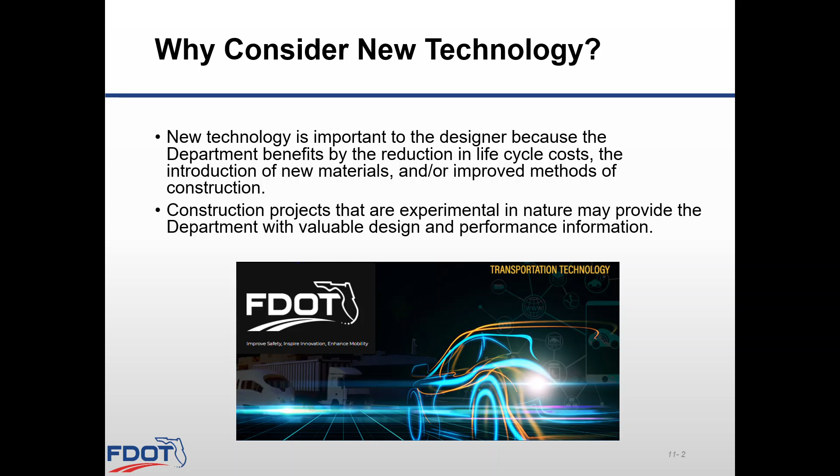Construction projects that are experimental in nature may provide the department with valuable design and performance information. Experimental projects should be carefully coordinated with the State Materials Office Pavement Evaluation Section to set up controls and experimental limits so that the detailed performance evaluations can be made over time. Experimental projects should be limited in scope and not used for the first time on a major interstate project.

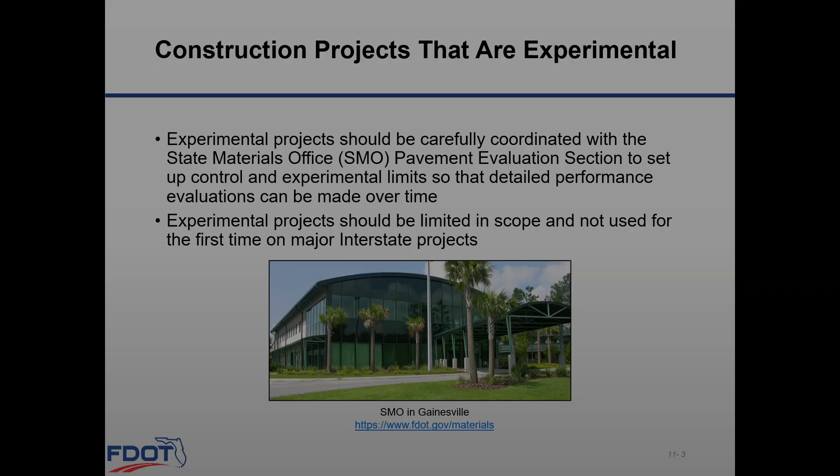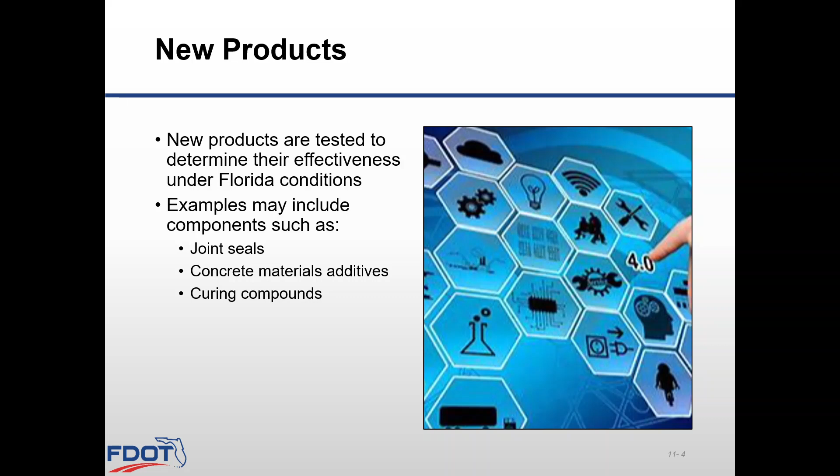This picture on the slide shows the State Materials Office in Gainesville and also their website to find any information and coordinate any experimental projects. New products are tested to determine their effectiveness under Florida conditions. Some examples may include components such as joint seals, concrete materials, additives, and curing compounds.

Generally, APT is defined as a controlled application of a realistic wheel loading to a pavement system simulating long-term in-service loading conditions. This allows for the monitoring of pavement systems performance and response to accelerated accumulation of damage. APT can produce early, reliable, and beneficial results while improving pavement technology and understanding prediction of pavement systems performance. So this website has some of that research, if you would like to learn more about the research that is being done or has already been done.

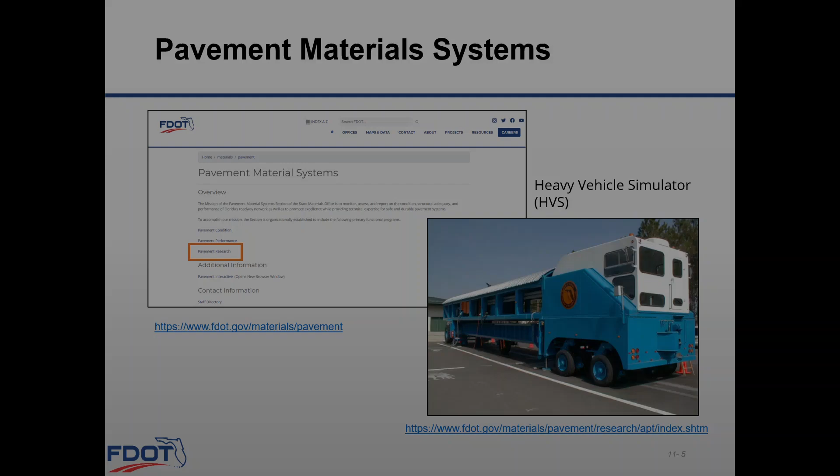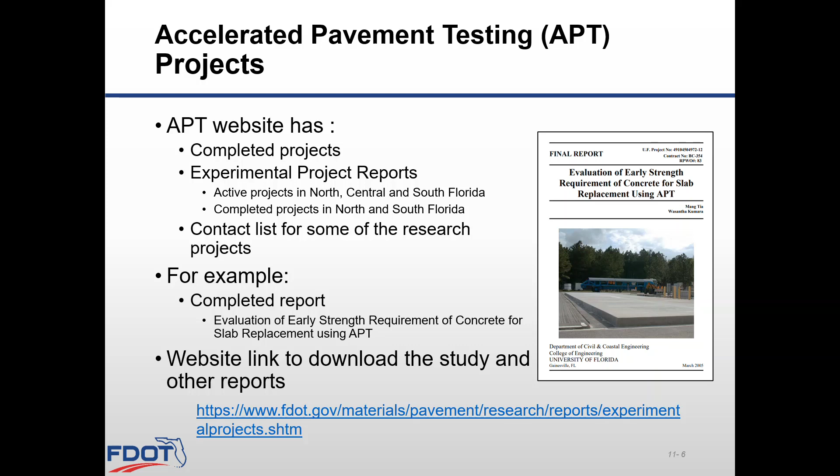Under the APT website, you can find completed projects, experimental reports for active projects in North, Central and South Florida, and completed projects for North and South Florida. This is just one example of the types of completed projects, the evaluation of early strength requirements of concrete for slab replacement using APT. You can download any of the research studies under the website shown on the link below.

Another experimental project that is ongoing is the FDOT concrete test road located on US 301. This is 2.5 miles of experimental concrete pavement open to real-world traffic. The objectives for this project are to perform structural, drainage, and calibration experiments. It is unique in that it is the only full-scale concrete pavement test facility of this type in the southeastern United States.

Some of the structural experiments are to investigate different concrete thicknesses and base types from 6 to 10 inches with 5 different base configurations and use of reclaimed asphalt pavement (RAP) as an aggregate. Some of the drainage experiments include 16 test sections that will be constructed with and without edge drains. Concrete joints will be sealed and unsealed to study the effect of water infiltration. 2 concrete pavement thicknesses will be used while keeping the base type constant.

The calibration experiment will consist of 16 test sections to calibrate the fatigue cracking equation within the Mechanistic Empirical Design Guide. In addition to these experiments, several surface textures will be applied to evaluate the effect on pavement friction, surface drainage, and tire-pavement noise. Some of the proposed alternative surface textures include longitudinal grooving, a combination of longitudinal diamond grinding and transverse grooving, and a new longitudinal grinding technique known as the Next Generation Concrete Surface, NGCS. Here's the website link to learn more about the concrete test road.

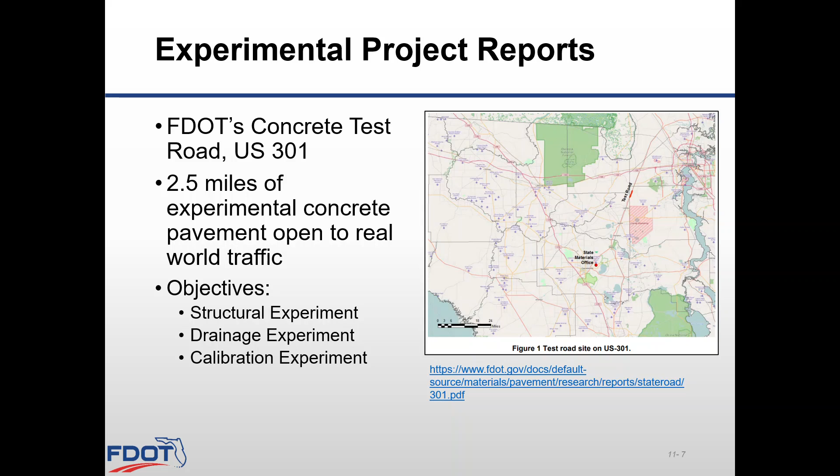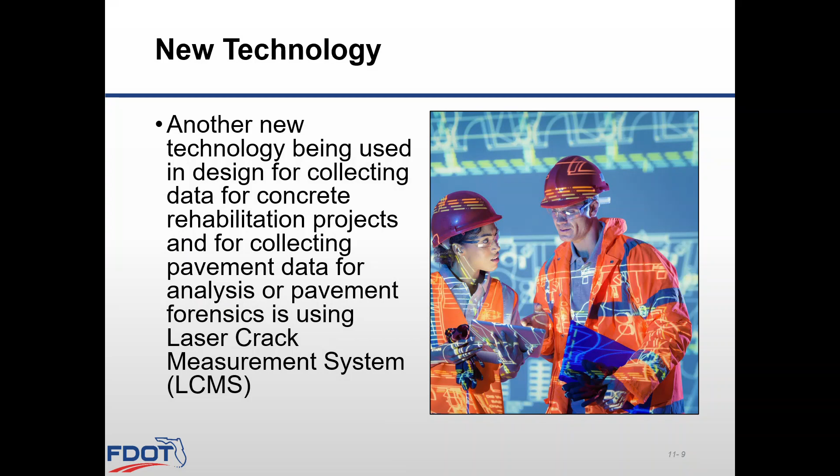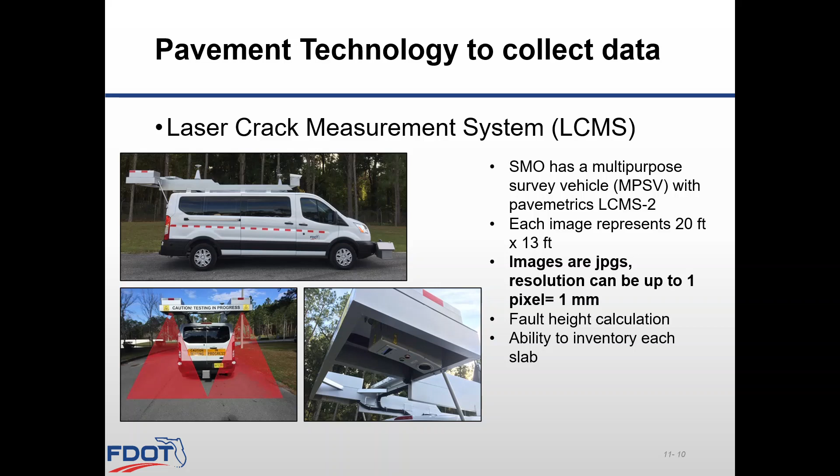Other new technology being used for collecting data for concrete rehabilitation projects and for collecting pavement data for analysis or pavement forensics is laser crack measurement systems, LCMS. The Materials Office has a multi-purpose survey vehicle, MPSV, with Pavemetrics LCMS-2. Each image represents 20 feet by 13 feet. These images are JPEGs, with resolutions up to 1 pixel equal to 1 millimeter. They can provide faulting height calculations and can inventory each slab, which is essential for designers as a safe method for collecting this data and analyzing concrete rehabilitation projects.

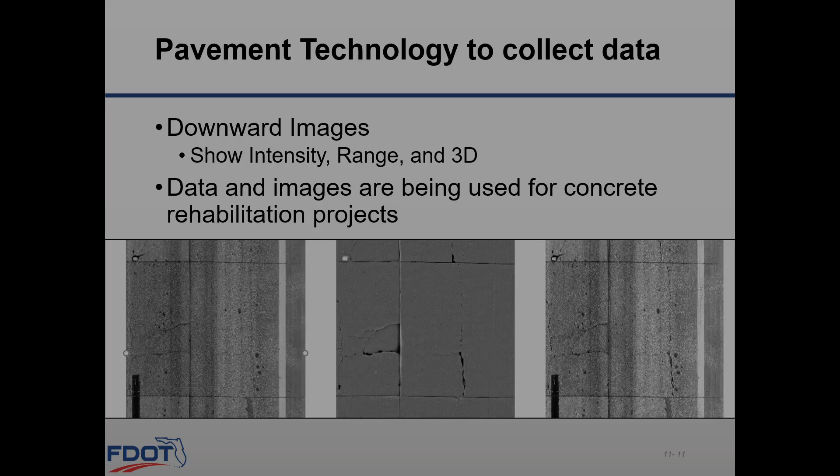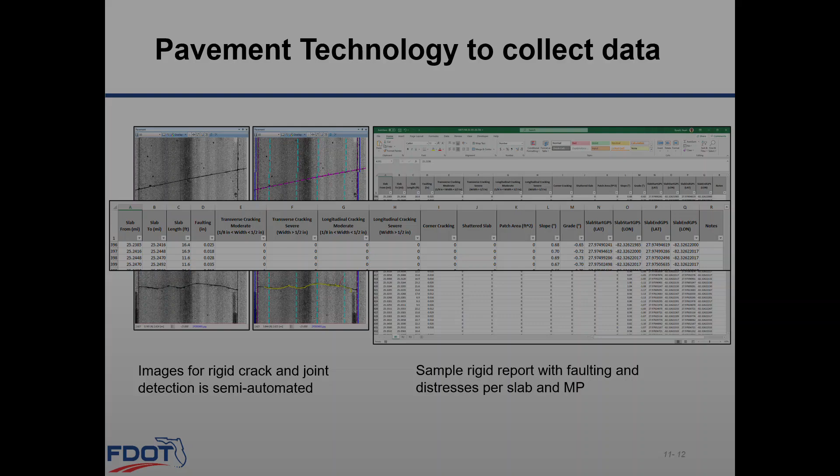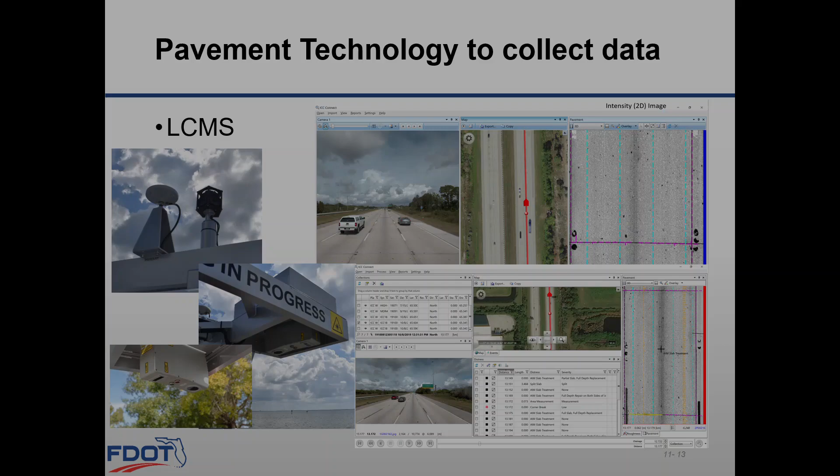This concludes Module 11. You're now ready to proceed to Module 12, Rigid Pavement Design Package.